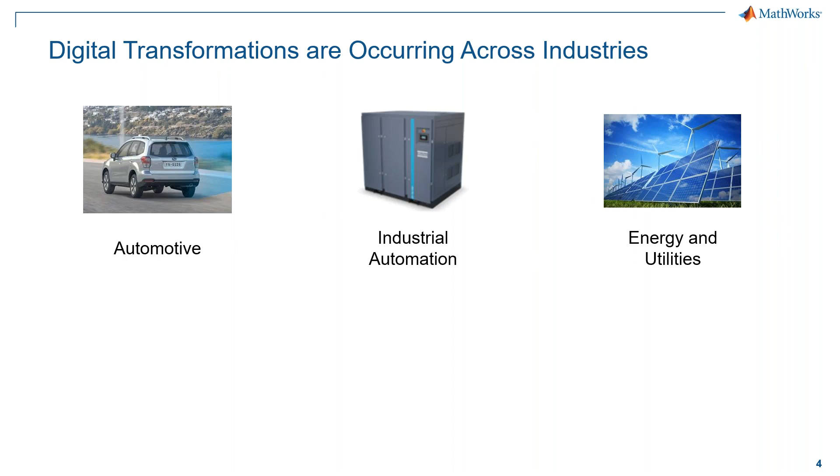These features have fundamentally changed how vehicles are designed and therefore the skill set required by engineers entering the industry. And this is not just limited to the automotive industry, but many others, including industrial automation, manufacturing, energy and utilities, medical devices, aerospace, and of course, education.

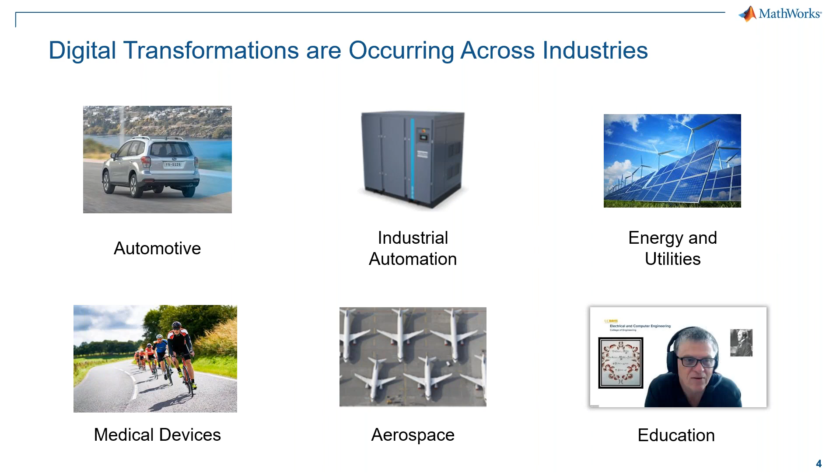What we want to discuss today is digital transformations in education, and more specifically, engineering teaching labs. As I mentioned, we're joined by Quanser for this discussion about labs, and Paul will tell you a bit more about why, and more about Quanser and how MathWorks and Quanser have been collaborating for a number of years.

I will, and hello everybody, and it would be a pleasure to meet all of you physically, but alas, we're here virtually today, and thank you for taking the time to join us here. Like Will was saying, Quanser and MathWorks have been partnered for over 20 years in really bringing to life a lot of these great concepts that MathWorks and Simulink with model-based design and rapid controls prototyping already bring to the table.

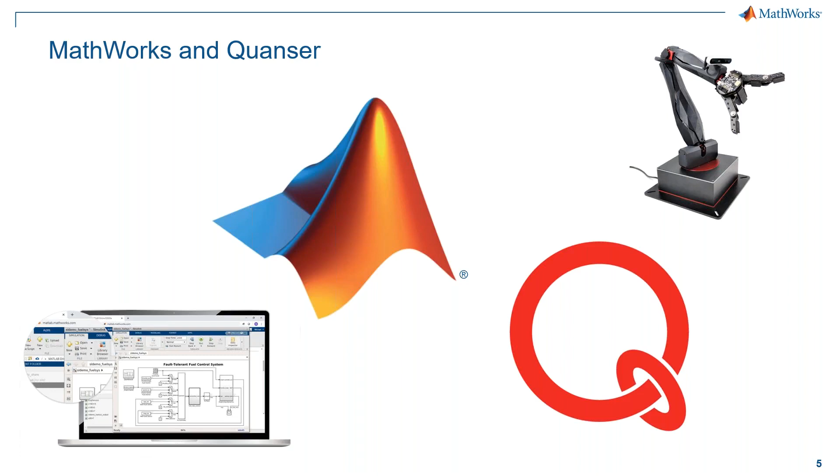What Quanser does, for those of you who don't know who we are, we take those great platforms and we apply them to our physical labs, be it for both undergraduate teaching and graduate research, and allow them to bring those concepts to life.

We've been in this business for over 30 years. You can see right here from our first product on the left all the way to our most recent product on the right. We always embody an academic-first approach to everything we bring to the table.

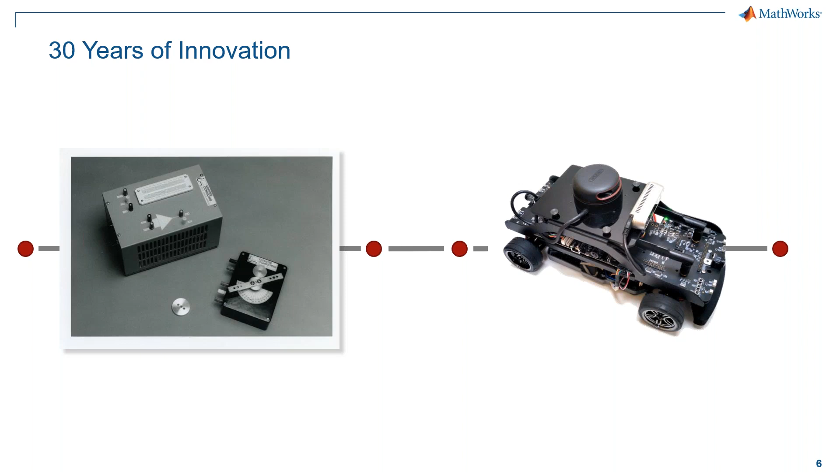What we do in support of academia is allow students in undergraduate programs to experience these concepts on real physical systems, and at the same time, like the car on the right, take those concepts all the way to graduate programs and be able to unleash state-of-the-art research in conjunction with our physical platforms.

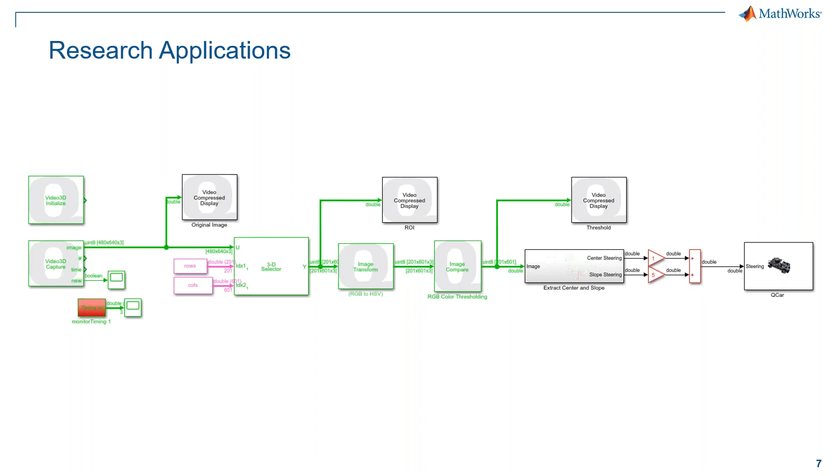Very quickly, just to give everyone an idea of the type of solution Quanser brings to the table along with the MATLAB and Simulink offering: here you can see a very high-level image processing Simulink diagram that essentially takes the video feed of our car, processes that data, and eventually comes up with steering commands to be able to keep the car on a path as it traverses a circle. This is the beginnings of bringing some of those concepts to life.

So this is me in my basement with one of our roadways laid out. In this case, I'm really trying to push the envelope of how fast I can traverse this track, knowing the only information I have is the lane in front of me.

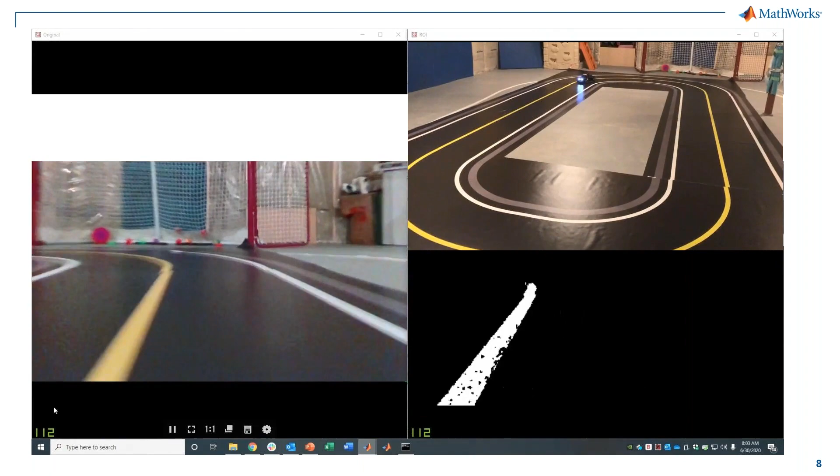As you can see, after some processing and a bit of tuning, I was able to navigate this at fairly high speeds. If I were to scale the speeds up, this would be in the 70 to 100 kilometers an hour full scale range. Really a great example of how you can take those theories and, with the power of MATLAB and Simulink, distill them and apply them to a physical system.

We want to talk about the digital transformation that's been going on in STEM education. Education has been transforming for many years, but COVID-19 dramatically accelerated this and forced the adoption of new technology and different modes of teaching. All of you have been handling this firsthand at your universities. We're focused on labs partially because arguably it's one of the most difficult parts of a course to move online and then administer online.

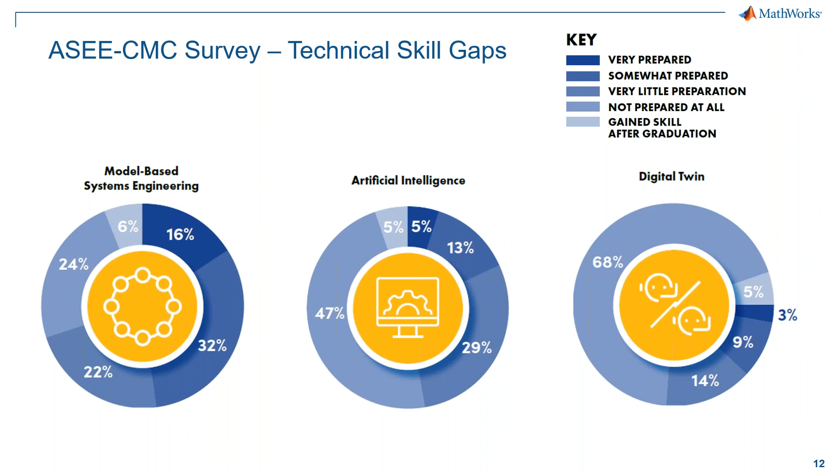These are skills being requested by industries that have been changing the way their engineers design and work, and these changes are ultimately being driven by the digital transformations I mentioned earlier. Now industry is identifying the need for these additional skills while still having the same needs with other technical and professional skills. Essentially, universities are being asked to do more in the same amount of time, or less.

While we have all this happening, it's not without significant constraints. We're sensitive to the constraints on university labs, such as the physical lab space that hardware and students need in those spaces, the scheduling challenges of lab sessions and headcounts and getting everyone who needs access to the labs, and then of course the blend of teaching and research needs that may need that same space or attention.

So achieving broader technical coverage and continuing to grow professional skills of students while enrollments increase and time and space limitations remain in place is challenging, if not impossible, without digital transformation on some level. So one potential solution to help mitigate all of these issues is to use virtual labs to complement existing lab activities, expand the potential learning outcomes, expose students to new technical areas, as well as extend laboratory contact time for students.

So to demonstrate this, I'll hand things back over to Paul, and he'll tell you more about the approach that Quanser takes and show some examples of combining the real hardware with virtual experiences.

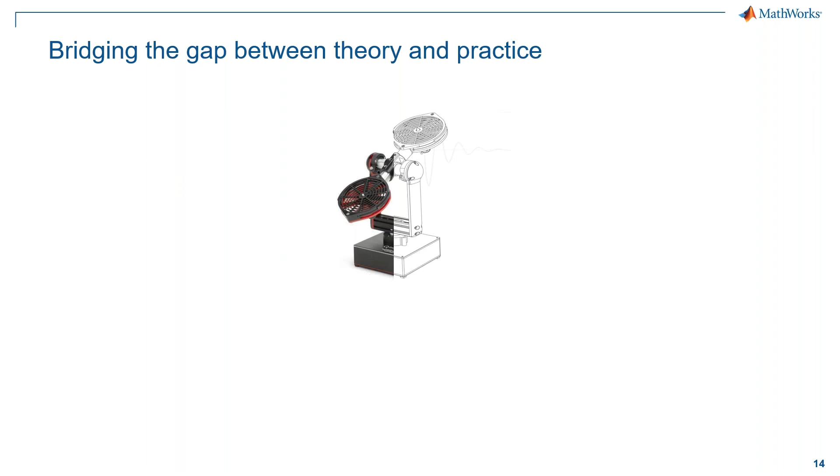A lot of this is captured in this image, in the sense that because we are academic in nature, we want to highlight the rigor and model-based design of everything that makes engineering what it is. We've always had this duality of how you take that theory and apply it to the physical, making sure the physical represents the theory to the best of its ability, and allow for this iterative approach of getting the theory from the lecture.

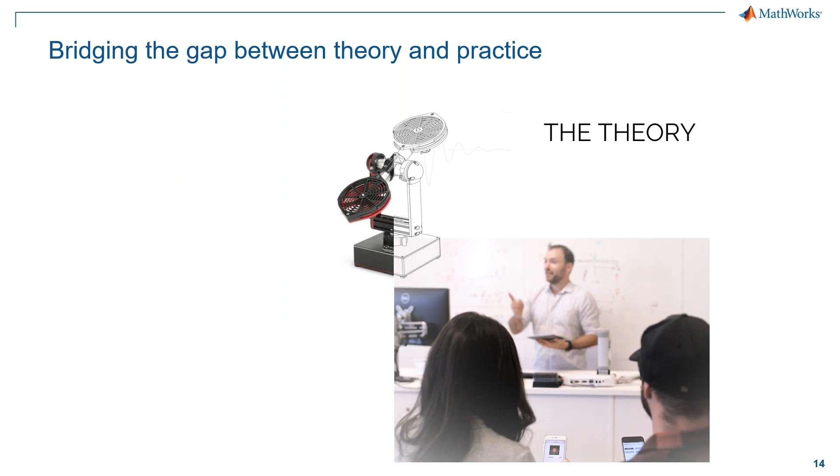This is exactly what you and your staff, as professors and researchers, do day in and day out, and are fantastic at it. Where we come into the picture, we provide solutions that we bring into the lab and into the research studio to allow for those concepts and theories to be applied, realized, and pushed further in the lab. This is a virtuous cycle that we truly believe in, and we've adopted this approach.

Traditionally this would be very much in person - you'd ideally have a lecture in the morning and be able to experience the concepts in the lab in the afternoon. But the pandemic got in our way, and what we were able to pivot to, which I'll show you in the next few slides, is taking that same approach and the same sort of hardware and physical applied methodology and bring it to life, delivering it in a virtual context. I'll show you some examples of exactly how we were able to do that.

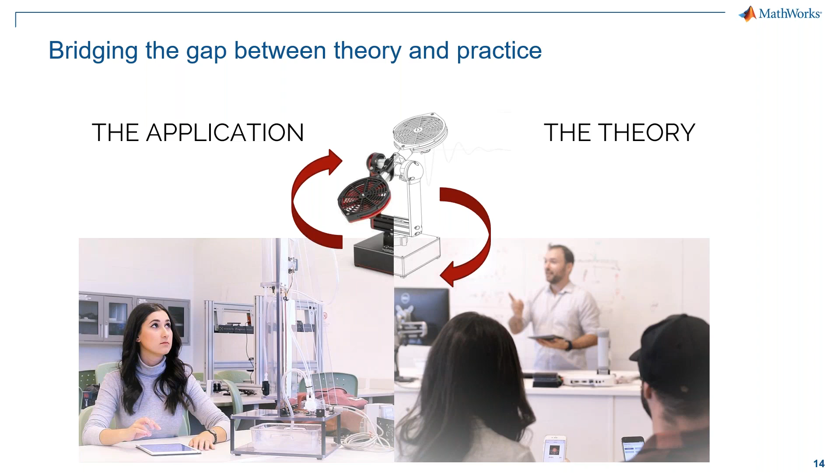At the highest level, inclusive of both our physical offerings and now our new virtual offerings that we've brought to light during the pandemic, these are still our pillars. This is what Quanser stands for, and we will always support this approach regardless of it being a physical or a virtual experience. We are academically aligned.

We ensure all our hardware is robust and expandable, with the ability to add on to it. And our software architecture, especially when combined with the power of MATLAB and Simulink, is truly open architecture and transparent, allowing any idea conveyed in the classroom or theorized in research to be put to life and put into practice.

All of our experiences are fully documented. You're never going to be left alone to figure things out on your own - we're here to support you, to give you all the content that will help you get the job done and realize your success in any various form.

Finally, this is what we also bring to the table: because we represent industry and see the best practices that have been evolving over the last little while, we highlight modern techniques of model-based design and rapid control prototyping, giving your students and researchers that skill set to really take their academic profession to the next level.

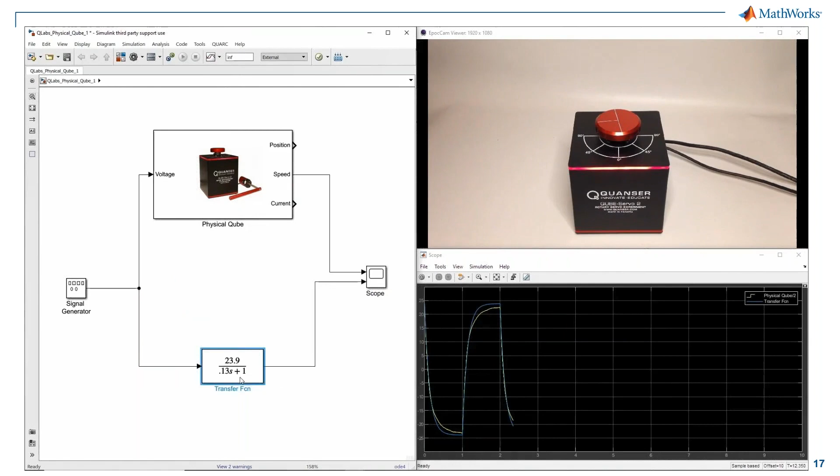This is a very quick, 8 times speed video. What you would see here is the typical demonstration I would do with one of our intro products. This is a DC servo motor example, and basically what this shows is how quickly you can validate the model.

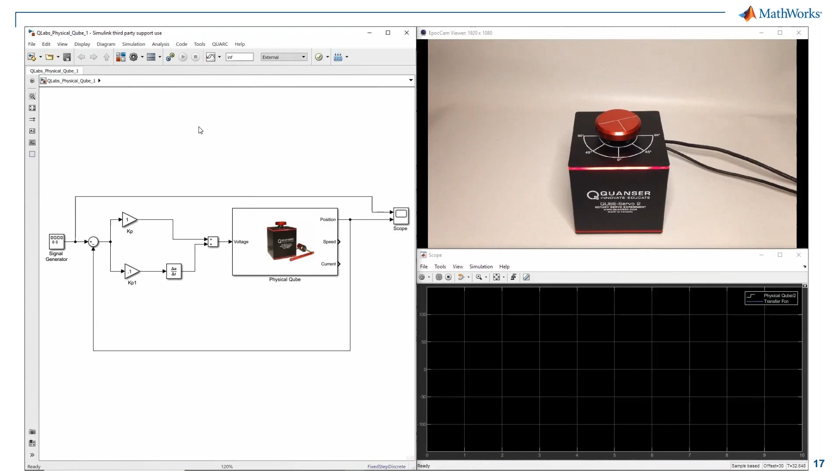So you spend a lot of time in the lecture deriving that model, and in the lab you can validate that model. Based on that model, you can very quickly — this is sort of showing the rapid controls prototyping element — tune a feedback control system that will give you the performance or specifications that you want.

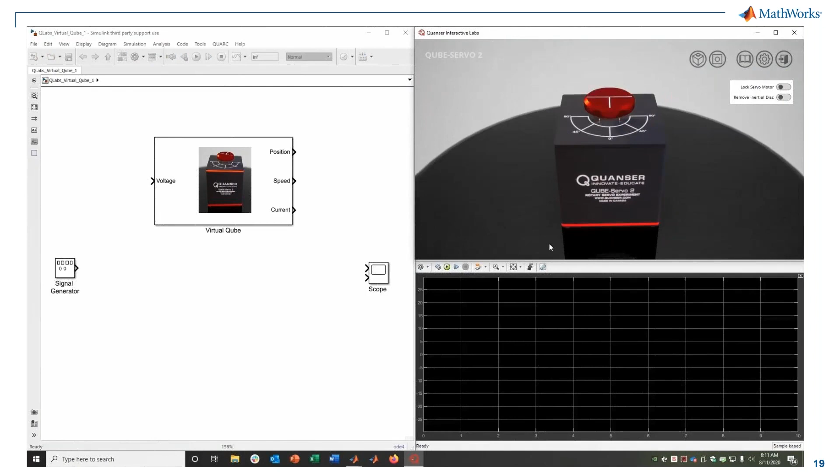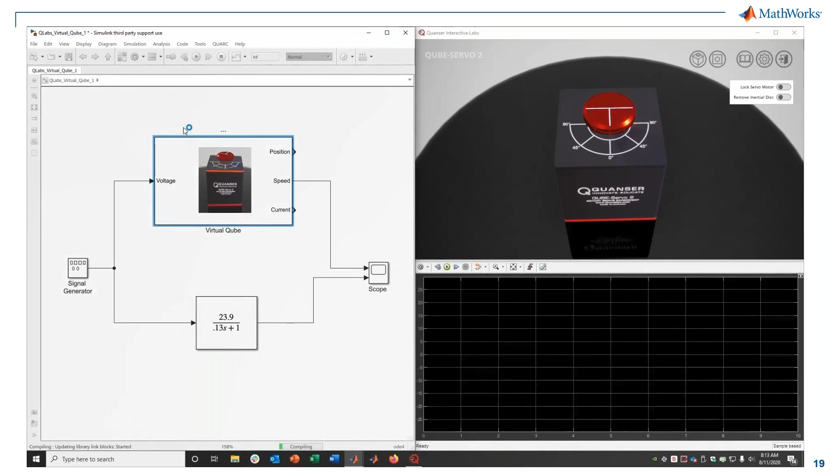This next video is very similar to what I showed previously, but instead of a physical Qube or physical product that would typically be in the lab for students to access, I now have a virtual product. But the experience itself, making sure that it represents the dynamics of the system and mimics the model that was theoretically designed to begin with, is all the same — the same nuances that you would have in the lab, as much as possible, brought to light in this offering as well.

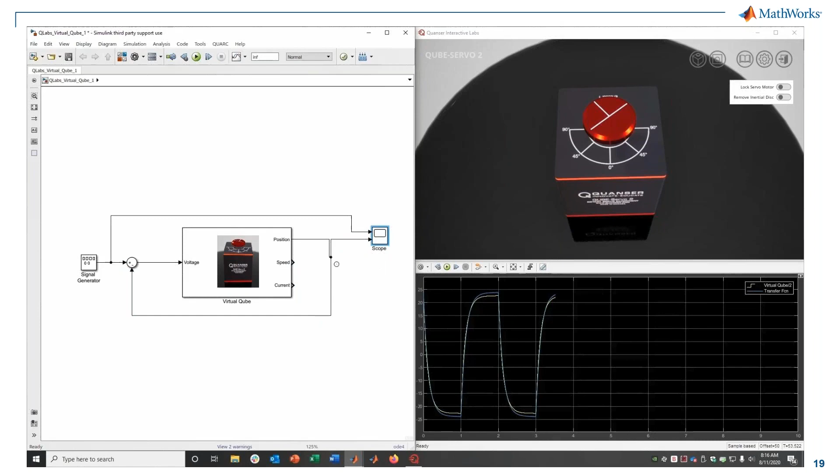So again, you validate the model that you derived in the lecture, and by leveraging what Simulink and MATLAB are great at — this open architecture canvas — I can bring a lot of these concepts to life. You can wrap different control systems, and use that model to actually tune and develop a very specific feedback control system at the end.

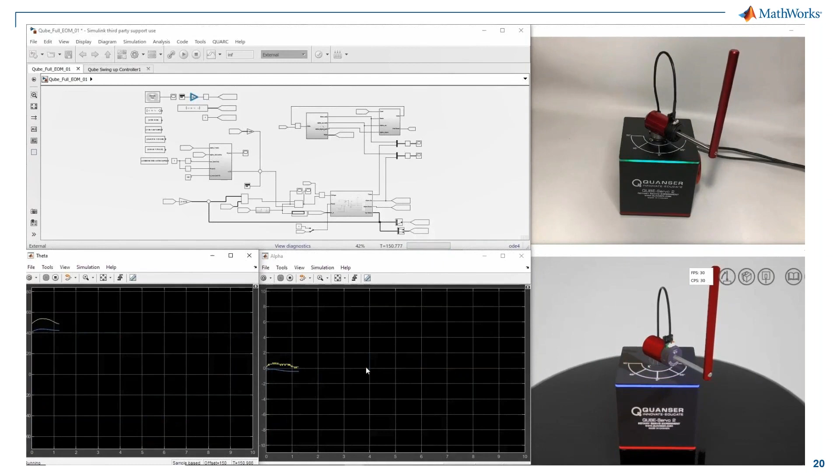Finally, this is a great video — it really shows, in this case, both of them together. What you're seeing here is once you do the DC servo motor example, we challenge the students by providing an unstable pendulum on top of it. The whole point of this exercise is: can you stabilize the pendulum by taking advantage of the model properties?

What we're showing here is how much effort we put in so that our virtual or simulated offering, the one on the bottom there, mimics the physical as closely as possible. We really sweat the details to make sure that the experience is on par with what they would have had in the physical lab to begin with.

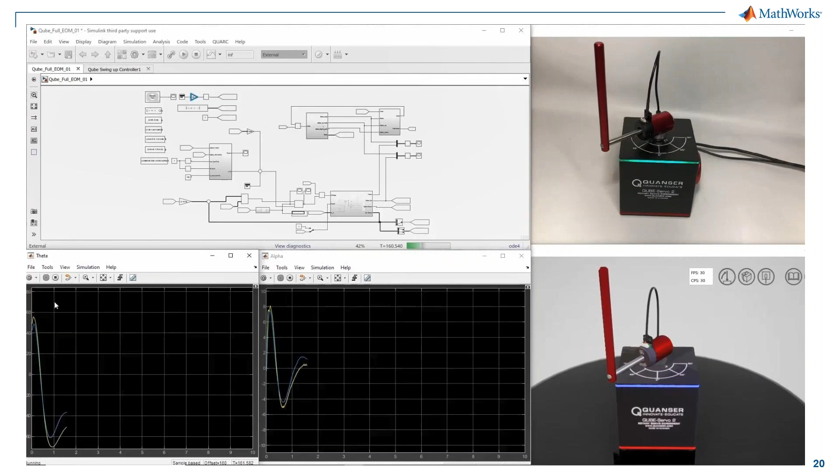Finally, here's another great video that shows one of our more advanced offerings. This is the Quanser QArm that was just released, and funny enough, because we were developing it through the pandemic, this was our first product that we ever actually released virtually first. So you can see the virtual offering that was released first, and a few months after the fact, we released the physical QArm.

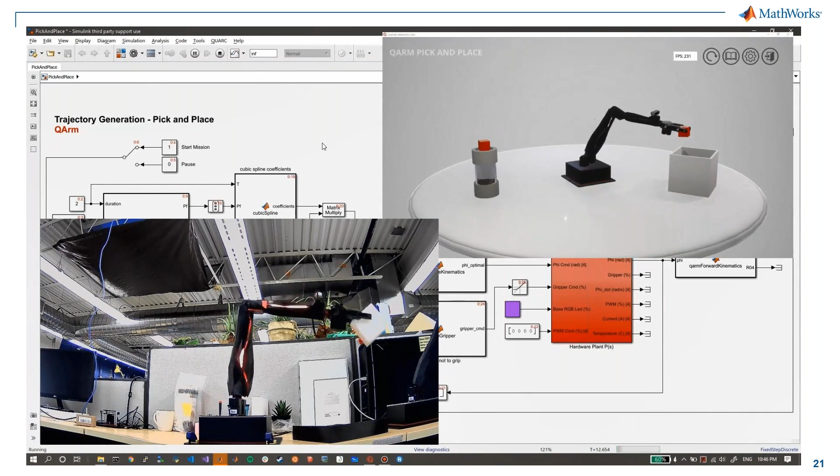The same type of experiences can be had with the physical and the virtual, and we truly believe the two will really pair well together. The benefit of something more sophisticated like a QArm is that now you can start putting in various environments that are more challenging. So you can have a conveyor belt, for example, where in the physical lab you might not have the ability to realize a conveyor belt, and you can do other things in the virtual space. So really, moving forward, we are imagining a world where it's both physical experiences, but well supported with virtual take home or remote activities as well.

For this example, I want to share a success story from one of our partners, where labs were taught online and in a hybrid in-person and online learning environment. This is at the University of Applied Sciences, Dresden. Here instructors in an electrical engineering course needed to provide online access to a signal processing lab. You can see a photo of the equipment that they're using in this lab here.

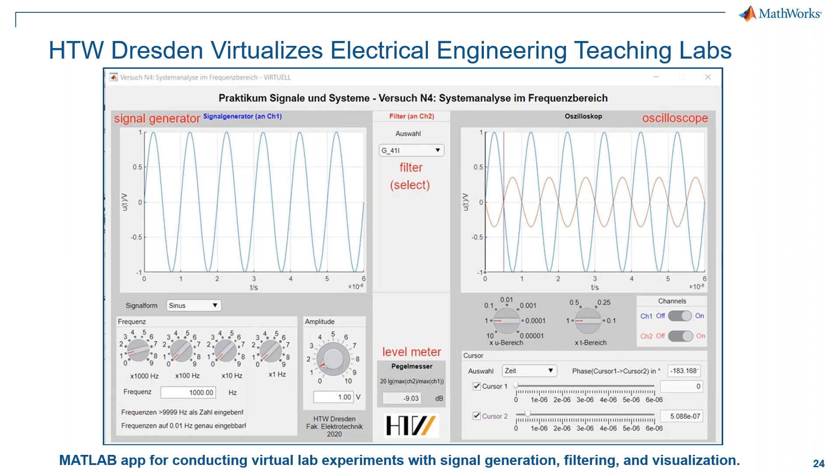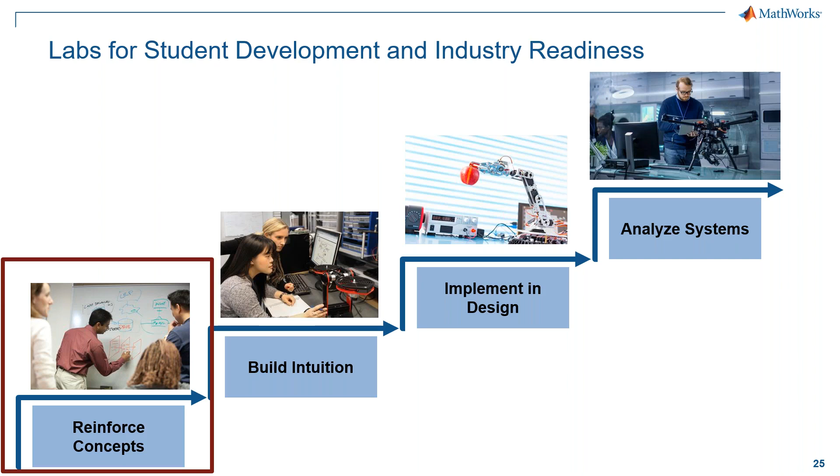Using a virtual lab, it doesn't need to be a dramatically different experience. We can stick with the same type of workflow typically used for lab activities. So now I'll show you something that we've been working on at MathWorks, and uses this approach for a virtual lab to reinforce a really fundamental concept.

This example is an air track collisions lab that may be included in an undergraduate introductory physics course for engineering students. I actually did this experiment myself as a student, so I was really excited when a member of our content team brought forward the idea. If you aren't familiar with the setup, mass is added to each of these carts, and they glide on this track. The track blows air, which makes a very low friction surface for the carts to slide on.

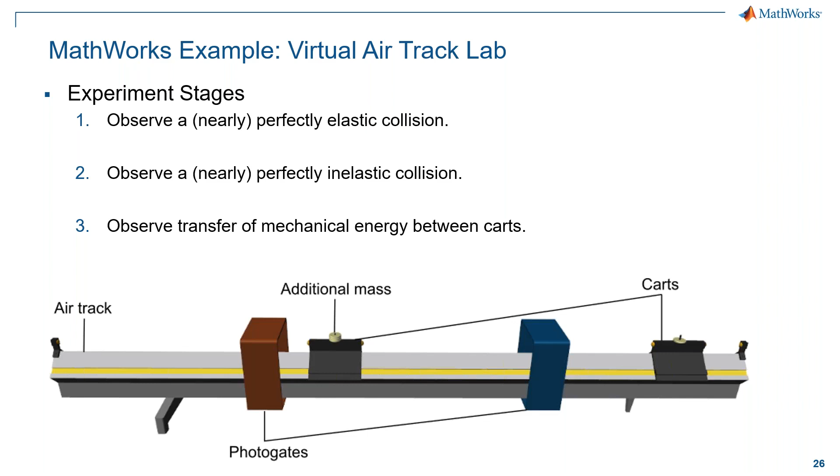So then students push the carts into each other and observe the results and iterate on this with a few different configurations. There are 3 stages to the experiment, where using the virtual hardware, students observe elastic and inelastic collisions and how energy is transferred between the carts when they collide. So let's see what this activity looks like now.

Here we're using a LiveScript as our lab notebook for recording data and performing calculations. First, the script walks through some of the background theory of elastic and inelastic collisions before introducing the experiment.

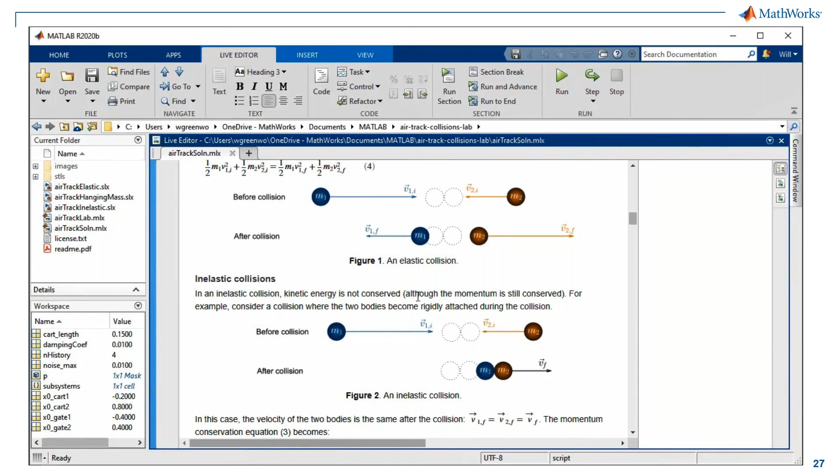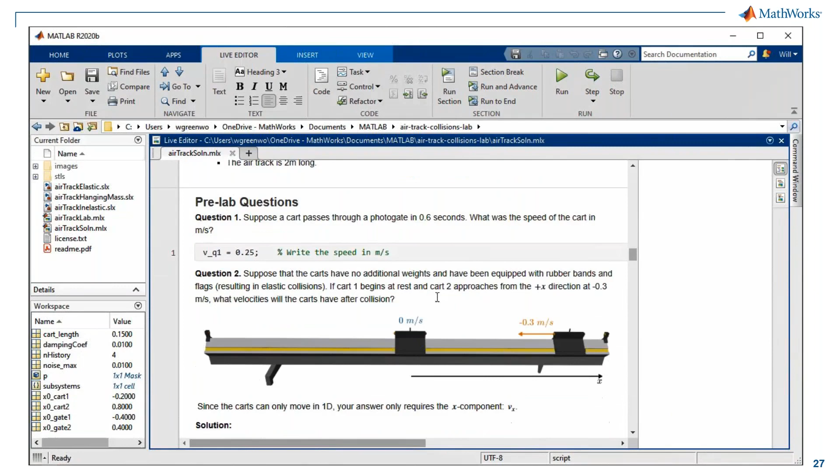Students explore the underlying theory and check to make sure they understand how to apply it before continuing into some pre-lab questions. Then the stages of the experiment are introduced and the setup is explained, followed by the procedure for launching the simulation.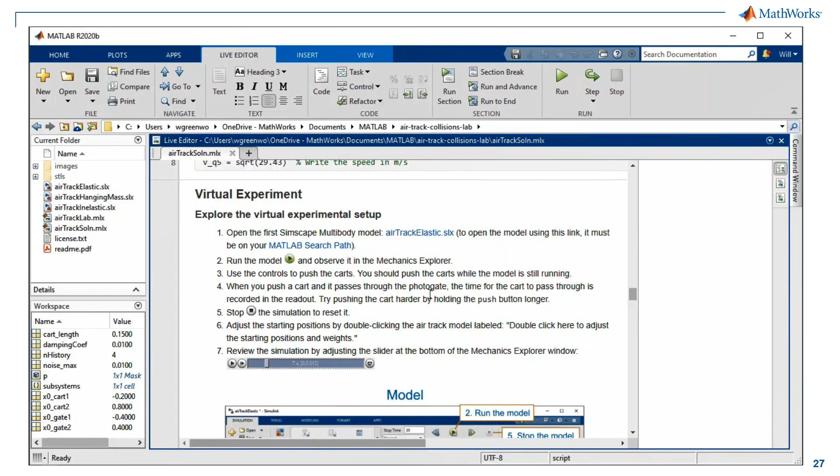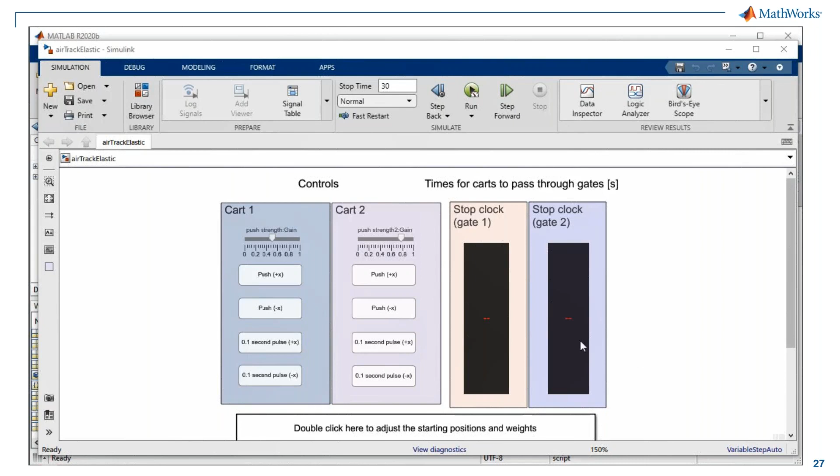The simulation is launched directly from the LiveScript, and the interface in Simulink has buttons for students to press. What's interesting is how long they hold down the buttons controls how hard the cart is pushed.

So it's a difficult thing to replicate, a little bit different every time you do it. Parameters such as cart masses and their starting locations can also be adjusted.

Here's the view of that interface that students work with. Again, they get data output on one side and on the other side the buttons they interact with, and they can adjust all the parameters as needed to experiment during this lab activity, or maybe they're doing this after using the hardware in person in the physical lab.

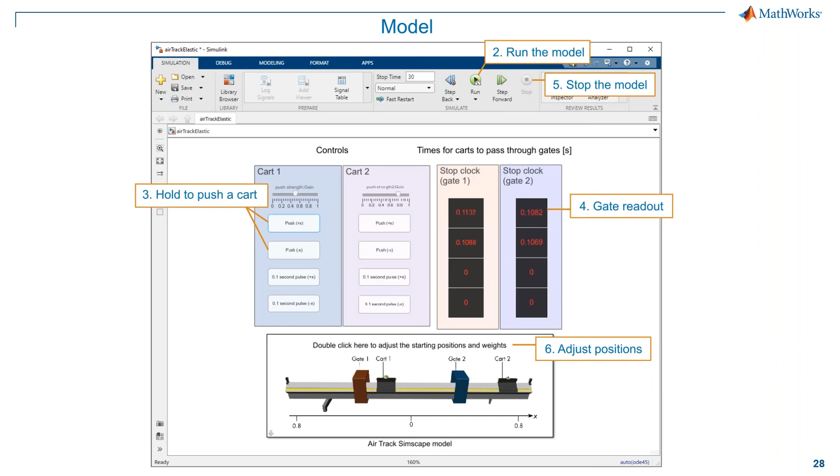The results of each simulation are shown in the Mechanics Explorer, and here I have a video of an example output from that.

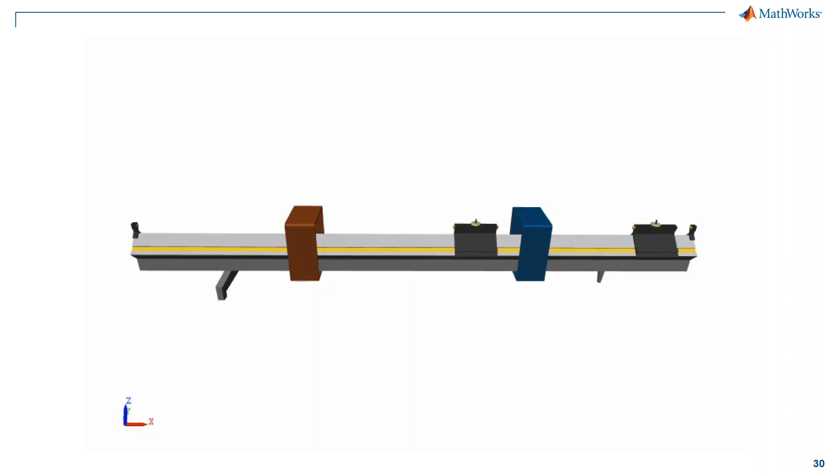So some of the key takeaways from what we've been talking about in the examples we've shown: hybrid teaching approaches to labs can really expand on the experience of the physical lab for students. Enhancing laboratory experiences long-term by combining virtual labs with that traditional physical lab approach can be really powerful, often enabling students to have a physical system of their own to work with.

Students can even access that virtual hardware without needing to come into the lab, so they don't necessarily need security or direct oversight all the time. This also creates opportunities to enable larger class sizes or even classes over larger geographical distances, giving more flexibility to instructors and students themselves.

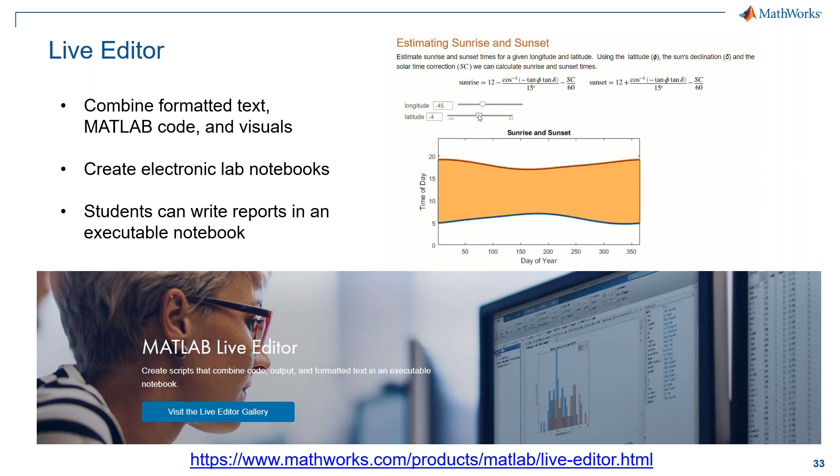Earlier I showed an example from one of our partners, and they created a MATLAB app to represent hardware in their lab. Apps can be created in the MATLAB App Designer and run in MATLAB or MATLAB Online. There are also apps installed directly with MATLAB, so your faculty might find something useful there for getting started creating a lab.

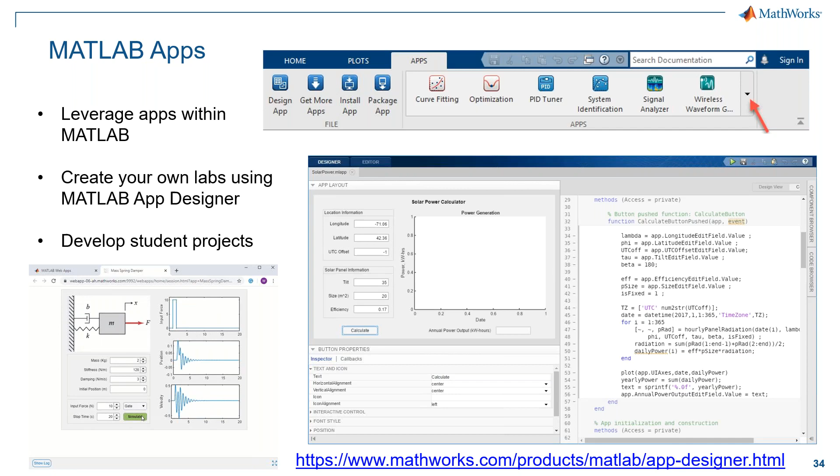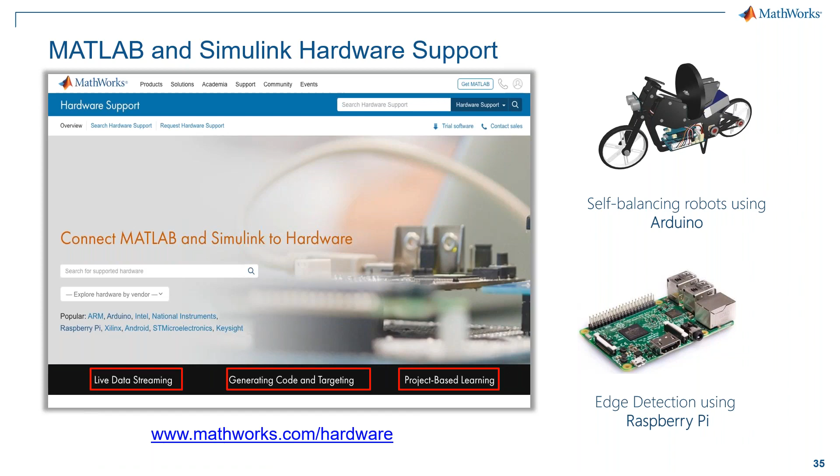There are also hardware support packages available for MATLAB and Simulink to help with labs and project-based learning. I didn't mention this in any of our examples, but ThingSpeak is our IoT platform. Students can use ThingSpeak for creating their own sensor projects and then importing and analyzing the data in MATLAB.